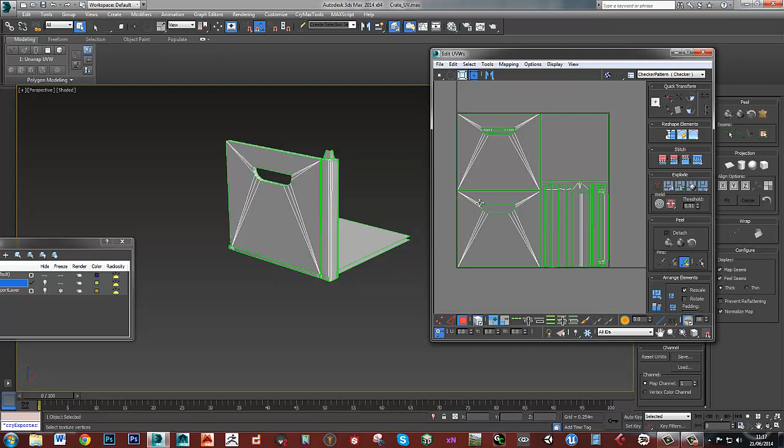There's just one thing that I need to do before I can bake this down, which is I need to make sure that none of my UVs are overlapped. So for example, this UV here, or this bit of texture on the bottom, the inside bottom, is the same as that piece there that's on the underside. So what I need to do is just to choose one of those that I want to bake, and the other one I'm just going to move it off to the side.

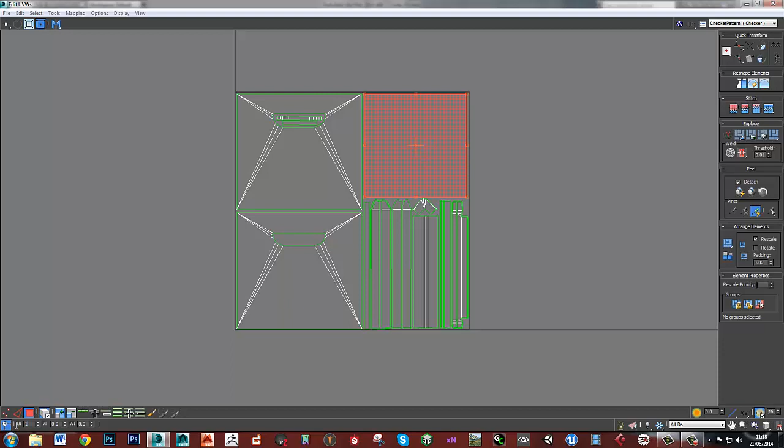So I'm going to bake this one. I'm going to bake the inside because I think you're going to see that more often than the outside. So what I'll do is I'll take this shell here on the outside, and if you hit this little box in the bottom left hand corner of the UVs where it says absolute or relative type-ins, if you put that in so it's highlighted and then just type 1 into the U, it'll move exactly 1 UV space off to the right.

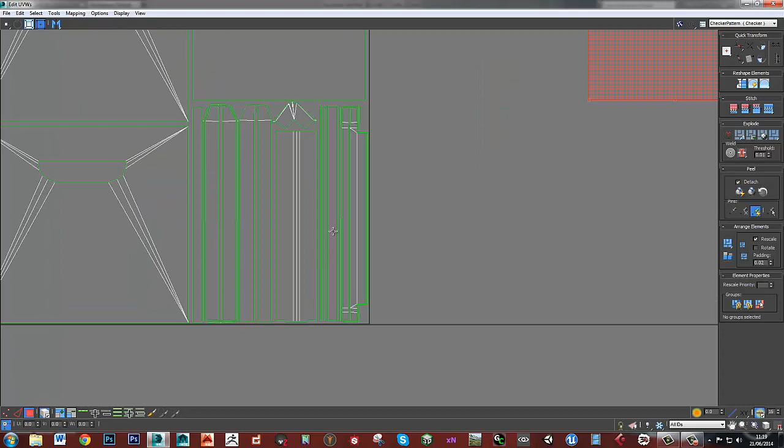So actually that is still on top of that. It's just that when this bakes, it's only going to bake what's in that space, but when you texture it, whatever you put in this bit of texture will go exactly onto that piece. So I think there's one other bit, which is these pieces here. So again, I'm just going to choose to bake that one and not this one. So I'm going to get these pieces, which are the same as those pieces in there, and I'm going to move them off 1 to the right.

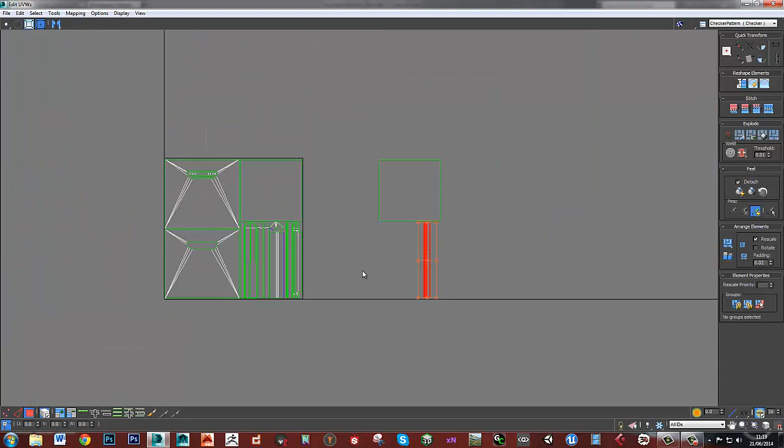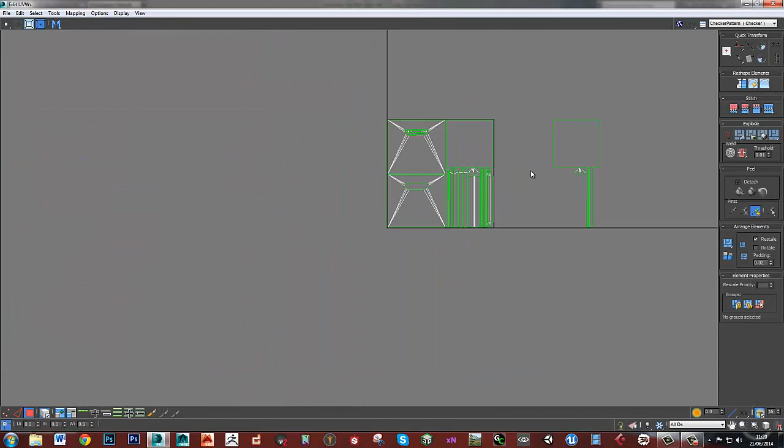And then just to double check, in fact there is another piece, because there's this bottom piece here. So that piece there also needs moving off 1 to the right, and that should be everything that was overlapped. But just to make sure, with the poly tool selected, I'll go to select and I'll do select overlapped polys, and provided nothing comes up, nothing highlights, then you're good to go.

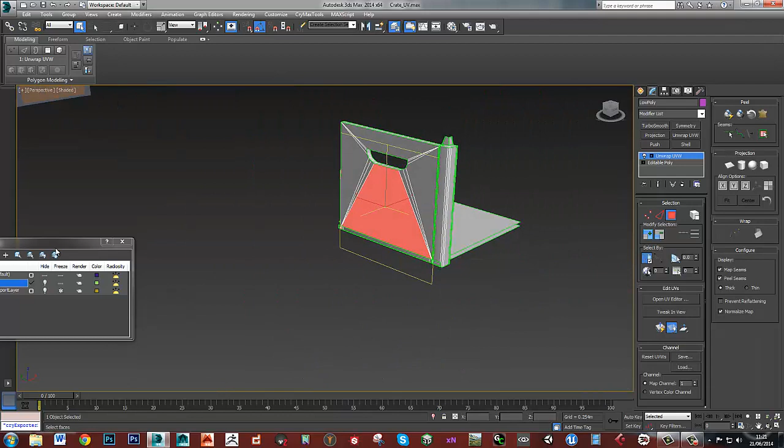Okay, so the next thing to do is to get this ready for the actual bake, and we're going to need 2 slightly different models. One that is exploded for the normal map bake, and one that isn't for the AO bake. So I'll explain what exploding is in a second when we get to that bit, but for now I've got my high poly on another layer, so I can just hide that on and off. So for now I will make it unhidden so I can see it.

I'm going to collapse that UV edit down and select my low poly, and what I want to do is to put a projection modifier on. So I'll just hit projection, or you can find projection in the modifier list there, and I want to say what I'm projecting from. So I'm projecting from the high poly, so I'm going to go pick and then just click on the high poly. So now we've got that high poly model in there. I've just called that high poly. It doesn't know that it's the high poly, it's just the name that it's been given.

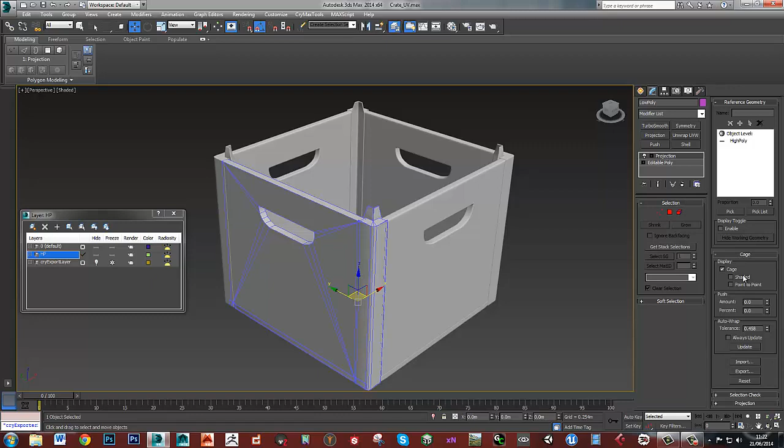Then what I like to do is to come down to cage and turn shaded on, because that makes it a bit easier to see what you're doing. Okay, so once we've got shaded on, you can see there's little bits like this where the high poly is just poking through that low poly cage. That's going to cause an error in the bake. So we need to make sure that this blue cage is pushed outside and is completely outside of the high poly. To do that, all we need to do is just push it.

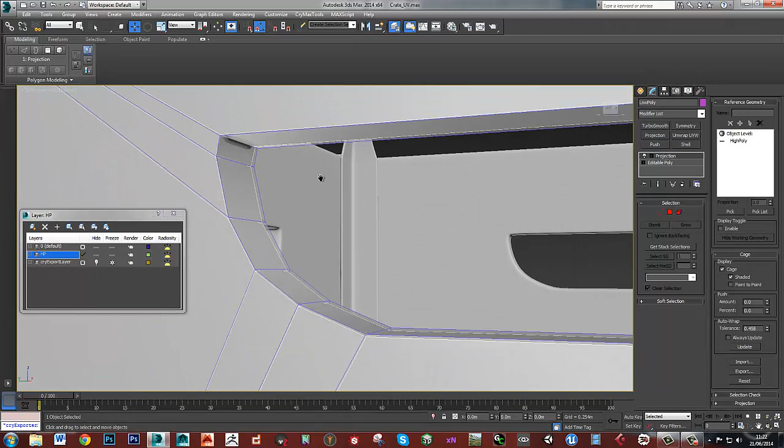So just grab that spinner, move it up until it's pushed outside. What you want to do with this is push things as little as you possibly can, but make sure that you've pushed them enough to completely encompass the high poly model. So I think I'm okay.

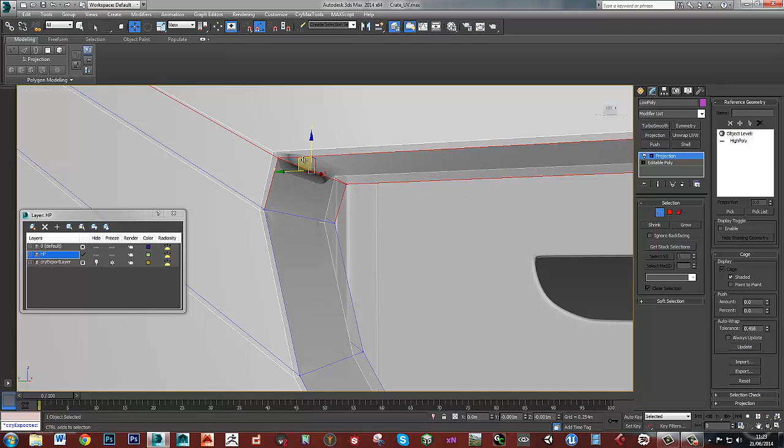It's just a piece there that's not quite pushed. So what you can do is go into vertex mode and move the verts on these cages manually. I really strongly recommend you don't ever do that. If you find a time when you need to do that, what you probably need to do is go back and alter your low poly model to be closer to the high poly model. It's just bad practice to move these individually. It makes it really hard if you ever have to rebake, meaning you have to do all of that again. It can be hard to remember what you had to do. It's time consuming. It's just bad practice.

But I think that's okay. I'm actually going to bake this in XNormal, but what I am going to do is a test bake in 3ds Max to make sure I've not got any issues, whether my cage is completely covering it.

So what I need to do is go to render texture, which is 0 on the keyboard. Then I can choose which folder I want to put it in. Okay, so I'm going to save it into that folder. And let's have a look at these settings.

So if we go into render settings and go to setup, I don't think we should have to do anything in here. You can turn these things on if you want to do a bake from 3ds Max. We're doing it in XNormal, so as this is a test, it doesn't really matter. We can turn padding off for now as well. We want to make sure that projection mapping is enabled, because that's what we're doing - we're projecting from the high poly to the low poly. You can come into options here.

For now we want to make sure that ray miss check is on. What that'll do is highlight in red any areas that our cage isn't covering, and all we're doing at the moment is a test bake to see that that is working. So then we want to add a normal map. We'll change the size of the normal map to, let's say, 1024, just so that we've got a bit of detail and we can see it. And then we can just hit render.

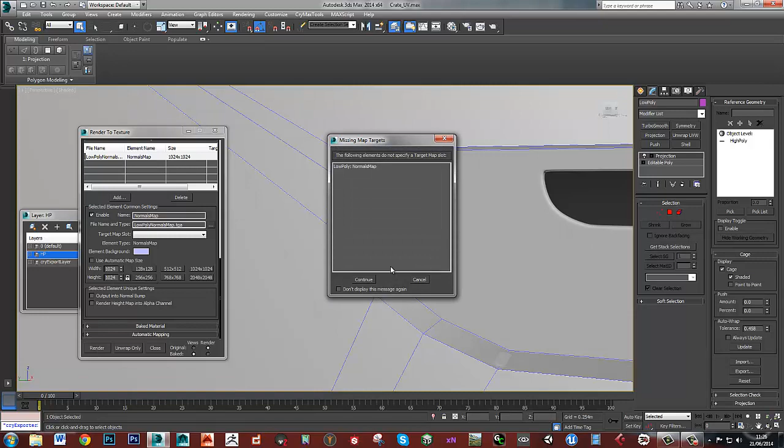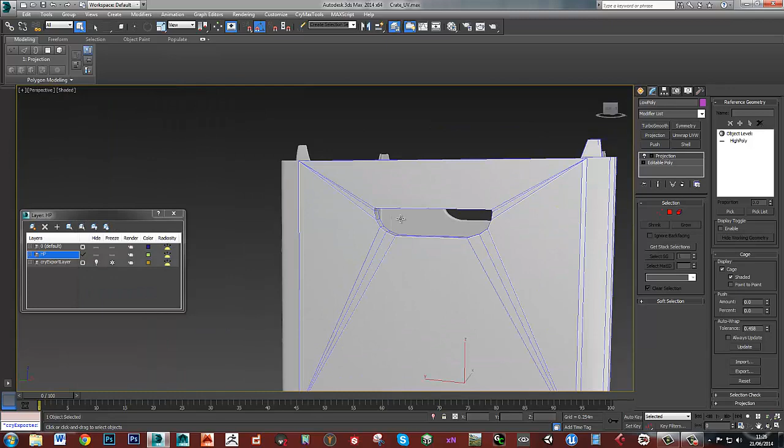Okay, so let's now export these into XNormal to do our ambient occlusion.

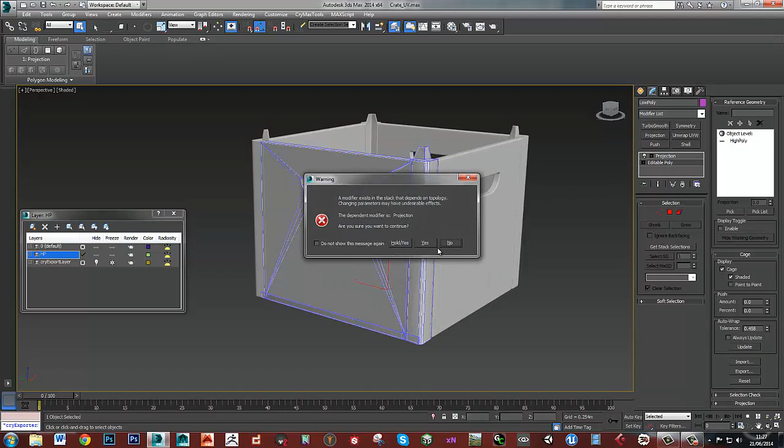So what we need to do is, in order to export this into XNormal, we need it to be an editable mesh as opposed to an editable poly that it is now. So if you just go down to your editable poly, click yes, that's fine, and then put an edit mesh modifier on, and then come back to your projection. You can see that's just triangulated that. XNormal just needs it to be like this in order to read the cage data.

Now we can go File, Export, Export Selected, and find where you want to export it to. Now, if you have XNormal installed, which is down here somewhere, then you should have in your save as type an XNormal SBM exporter. If you don't see that, you need to stop this video, go and sort out XNormal, go and install it. It's free to download, so that should be okay.

Then what we'll do is just call this low poly crate or whatever you want to call it. Save that as a .sbm file, and click on the low definition mesh, which will export all the options you need for the low poly mesh. Click export, and you should get the scene was exported successfully, so that's good.

Now we'll get our high poly mesh file, export selected, high poly, save that, and this time that's going to be a high definition mesh. This doesn't need to be an editable mesh, it can be an editable poly for the high poly one. Click export, that's going to take a little bit longer because it's got more data in it. Okay, close, that's good. So now let's open XNormal.

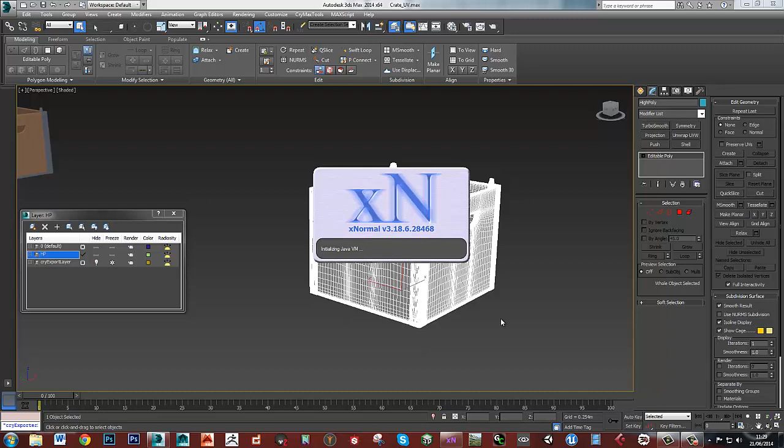First, make sure your options are set correctly. Go to the plugin manager, open that up, go to tangent basis calculators, and find MikkTSpace. Click on that and go to configure, and make sure compute binormal in the pixel shader is ticked. If you're exporting to Unreal 4, which is what I'm using most of the time, you'll get slightly better results if that's ticked. It's hardly noticeable, but you get a little closer to a synced normal in Unreal 4. So just make sure that's ticked. We can shut that down.

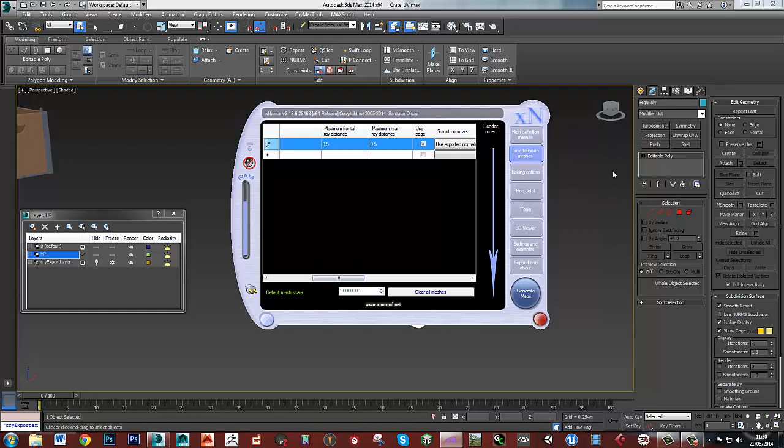Then we're going to go to high definition meshes. If you've got something in there, just clear these out of high and low. Right click in there, add mesh, and let's find our mesh. So it's this, that was the high poly. Low definition mesh, add mesh, the low poly. And we want to tick use cage because we already set up the cage, that blue thing we used in the projection modifier.

Baking options, let's choose somewhere to save this, so put it in there. Oh, I've already got a folder called that. And this is going to be an AO map.

In order to do our normal map, we'll need to explode our mesh first, so we're going to make sure ambient occlusion is ticked, and we'll have a little bit of padding. 2 padding should be enough for the AO, you can put that up to 4 if you want. I'm going to do this at 2048 by 2048 with a mind to my final game ready asset being 1024 by 1024, so I'm baking everything out at double that resolution to have those high resolutions to work on in Photoshop.

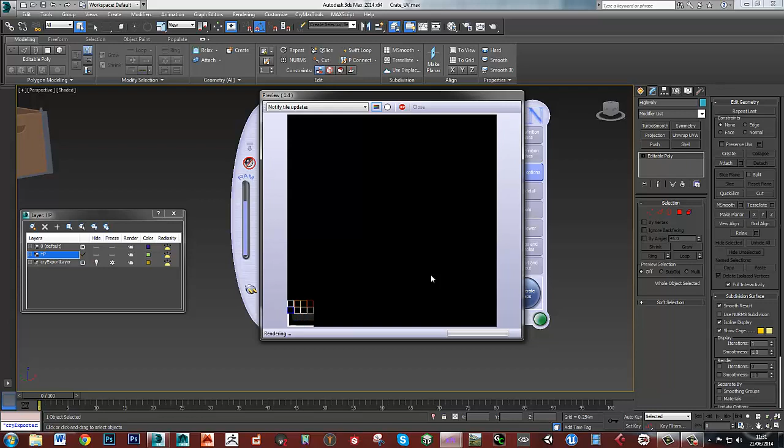Then I think we're good to go. Anti-aliasing can be set to 1, that's fine, all this is fine. Hit generate maps, and this is going to take a few seconds, so I'll just pause the video.

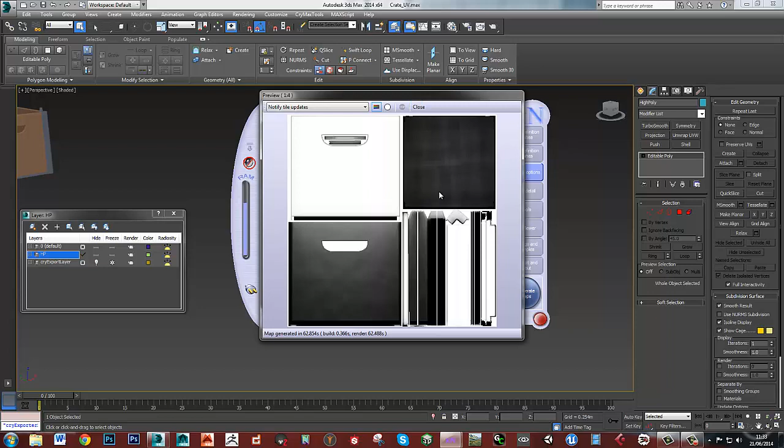Okay, once that's done, you should see something like this, which is essentially our AO, just these shadows baked down onto our UVs. That looks perfect to me, nice and neat. I can't see any errors in that, so I'm happy with that. And I'll close that down.

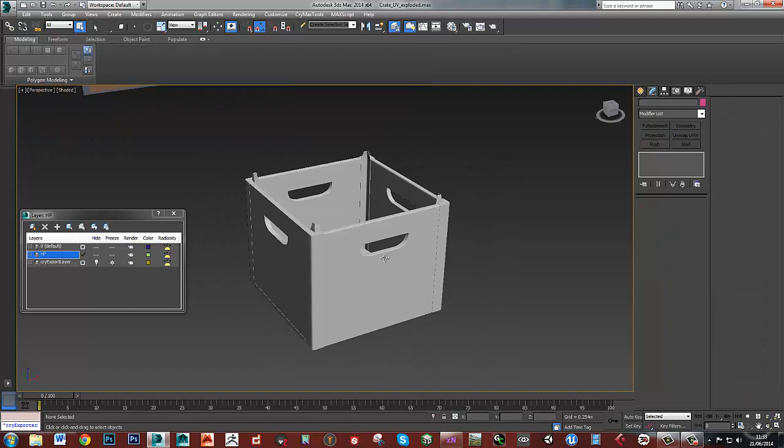The next thing I need to do is what's called exploding the mesh. So first I'm going to save this as UV exploded, as a separate file. There's loads of different ways of doing this, you can use material IDs. Experiment with different methods and find one that works for you. I tend to just explode the mesh, which is maybe not the fastest way of doing it, but I understand what I'm doing with that.

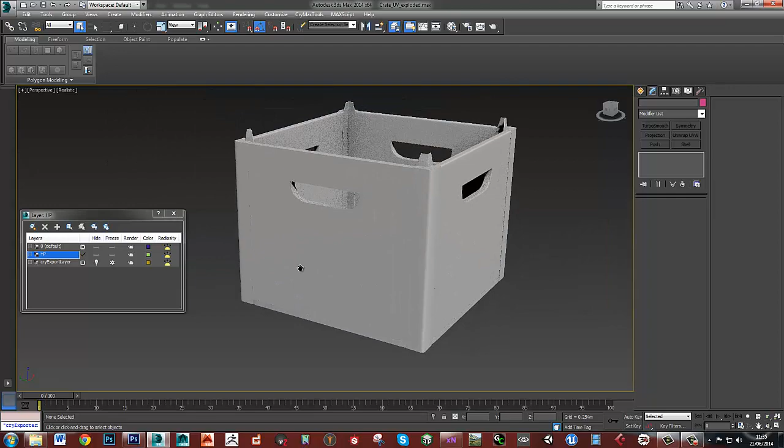So what I mean by exploding the mesh is, if we look at this, I've loaded up the AO map we just baked. What you're getting in here, if you look at areas like this, we've got where the bottom of this crate sits on this side piece, we've got some shadows baked into that. That shadow there, let's get back to 3ds Max, let me put that to realistic. It's this piece here, this strip of metal along the side. So we're also going to have shadows where this strip of metal sits over the top, which you can just see starting to form in there. Basically all this has got one piece of geometry projecting onto another piece of geometry.

In our normal map, we don't want the shape of this piece of wood being altered by this piece of metal. So we want to separate them all out, and one way of doing that is by exploding it.

I'm going to drop that down to an editable poly, and what I usually do is put an edit poly modifier on top, not edit mesh. Now we can take the elements one by one and start to move them out of the way.

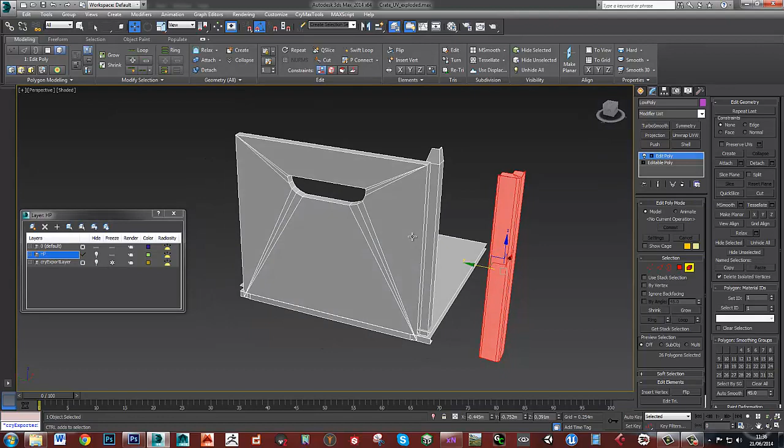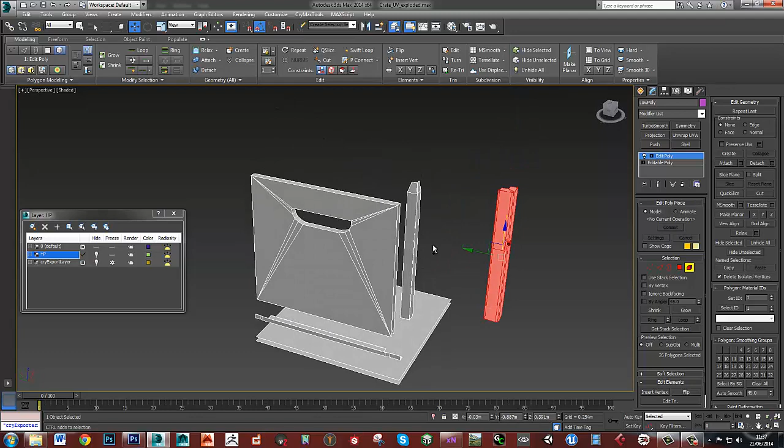I'm going to move this one over here and hide my high poly. I'm just moving them so they're not overlapping each other anymore. If you move them in just one axis, it makes it easier to line up the high poly after, so rather than moving it up here or something, just move it directly down or directly to the side.

Okay, so that's done. We can turn our edit poly on and off now, and as we turn that on and off, we can still go back to what we originally had.

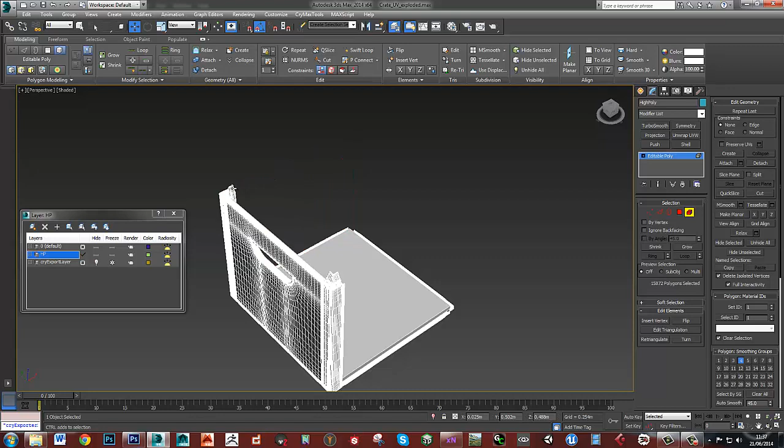Now we need to get our high poly, and what I'm going to do is delete all of these elements now that we don't need. Before, when I was doing the ambient occlusion, I wanted those elements because I wanted the shadows baked from one thing to another. Now that we're doing the normal map, I don't want them.

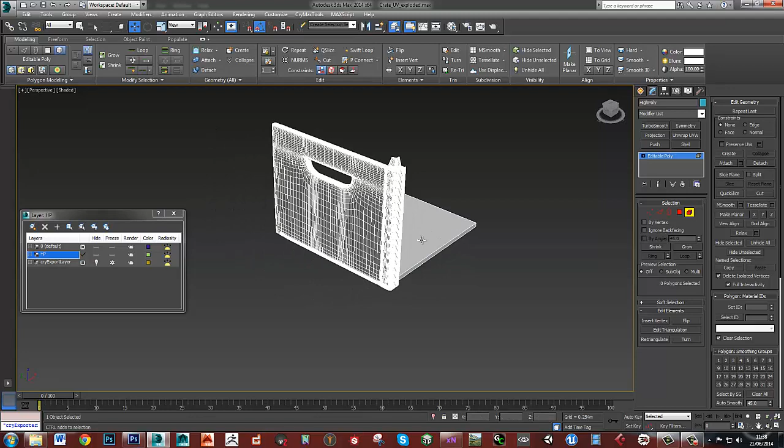Okay, so we've just got those pieces. Let's make sure that our low poly is exploded, and then let's get our high poly, and then it's just a case of getting these elements and moving them to line up again.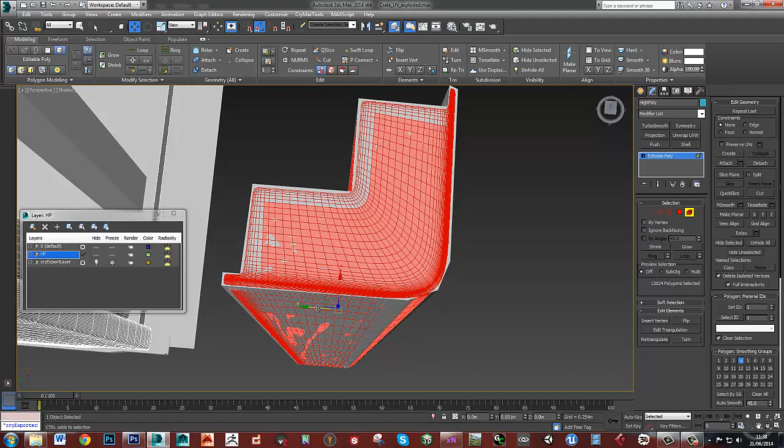So you want to be fairly precise with this, so just take your time, and I'll pause this.

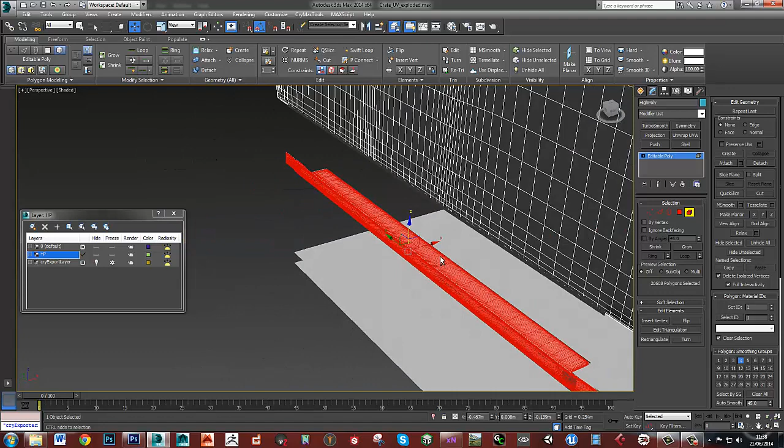Okay, so that's done. One thing I should have done that I didn't think to do was put that into another edit poly modifier as well, but it doesn't really matter since I've saved it as a separate file, so that's fine.

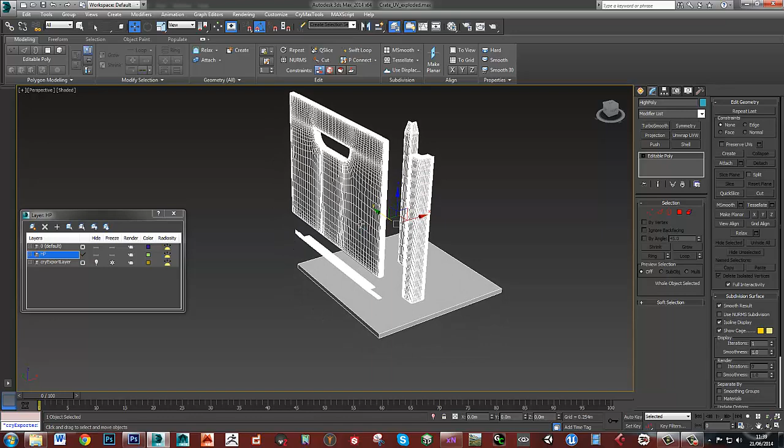So now our low poly and our high poly are matched up again, but nothing's overlapping anymore. So now I can just repeat the process. I can get my low poly, put a projection modifier on, pick the high poly - oops, not pick list, just pick.

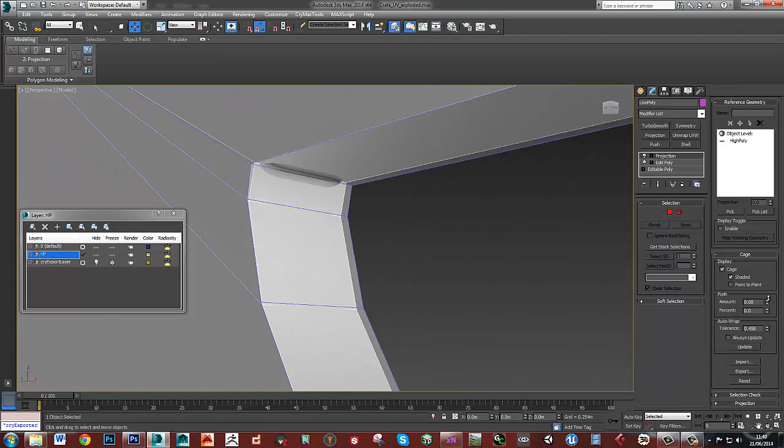I can pick the high poly, turn shaded on, and make sure that, I think this was the bit that stuck out most, so as long as that bit goes over I should be okay. So I can bring that out again. We can do a test bake, but I'm fairly happy that's going to work.

So that's it. Again, now I need edit mesh on so that I can export that to XNormal. Now file, export selected, I'll call that low poly exploded. Terrible writing.

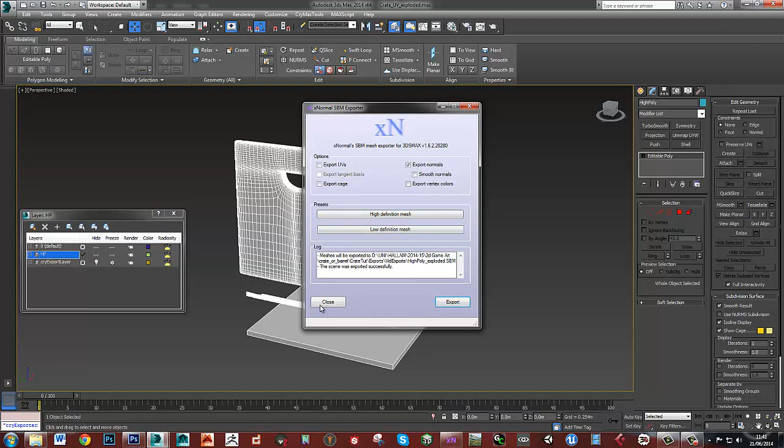And I will select low definition mesh and export that. Then I'm going to take my high poly and export that, and that's high poly exploded. Save that. High definition mesh, export, close. So back to XNormal, clear all these meshes.

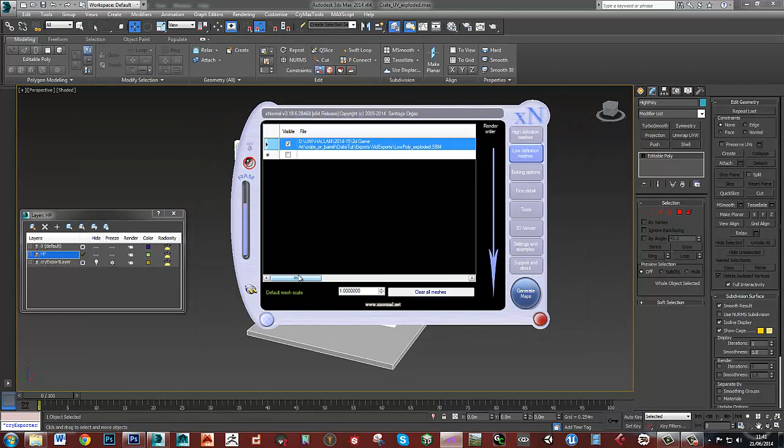Let's get my high definition mesh, which this time is high poly exploded, and my low definition mesh, which is low poly exploded. And I want to make sure my cage is turned on again, so use cage.

Baking options - this time we're not doing an AO, we're doing a normal map. For normal maps you just want loads of padding, so 16 is probably enough, to be honest, but you can't have too much padding in a normal map, so just turn it right up to 64 or something.

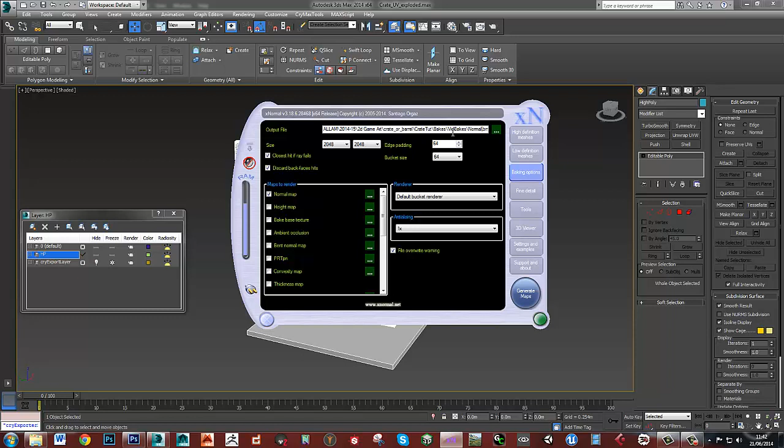This time this one's going to be called normal, although it'll put that suffix on anyway, and with a bit of luck we can just generate the maps, and that looks fine. So let's just put the padding on after. That looks okay.

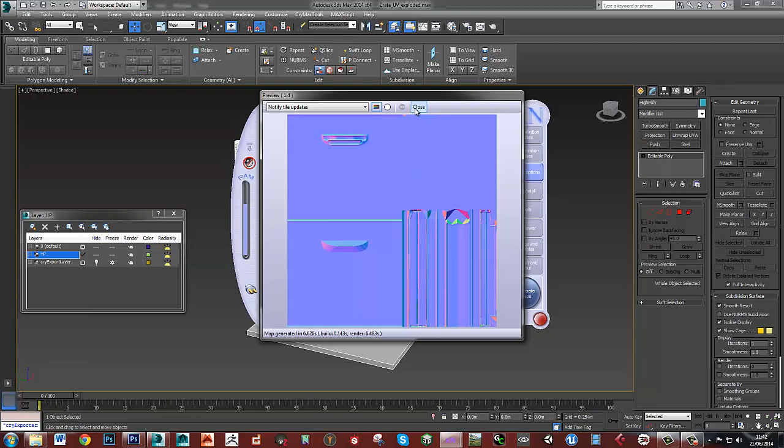So the last thing to do, or the sort of last step of this, is just to test everything in something like Marmoset. It doesn't really matter, but just make sure that your normal map is looking okay. So shut down xNormal, and

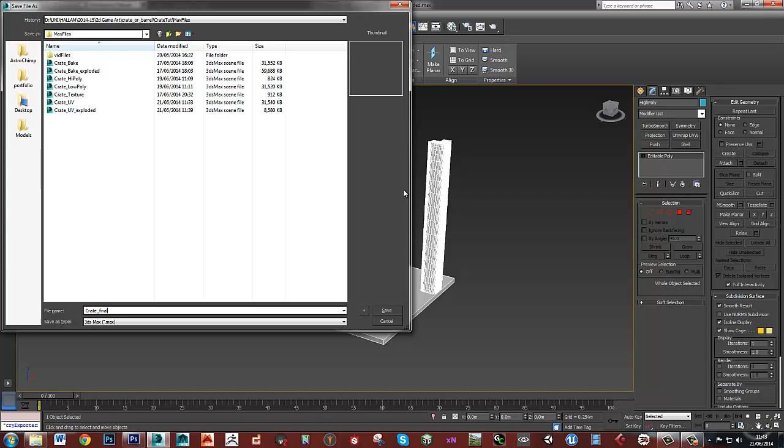what I will do is I'm just going to build my crate. So let's just save this as something else. Let's call it final model or something, and I can delete my high poly out of this now. I can get rid of all of these, back to there, and all I want to do now is just put my mesh together. So I need one of those. It's going to sit here.

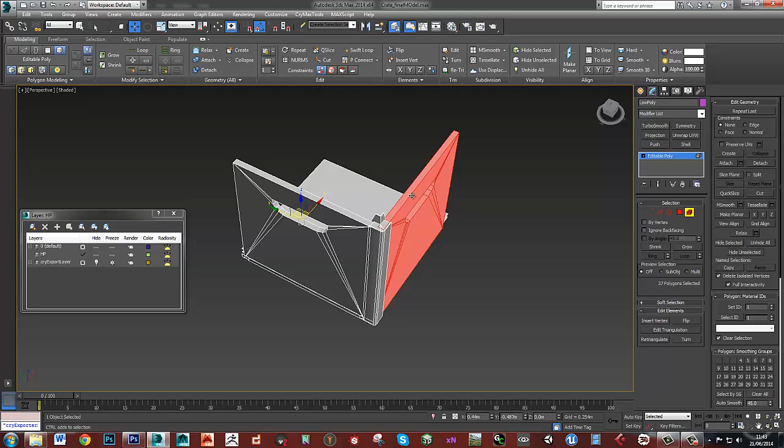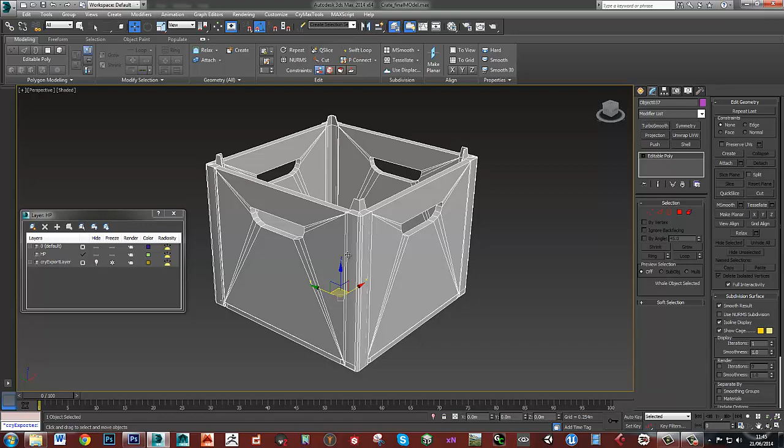Like that. Okay, so I'm just going to go around and turn this back into a full crate. And as I'm doing this, my UVs are staying stacked on top of each other, so I don't need to worry about those. Okay, so here's my crate, and let's export that. So I'm just going to do file, export selected. I'm going to export this as an OBJ file. And let's call this crate done or something.

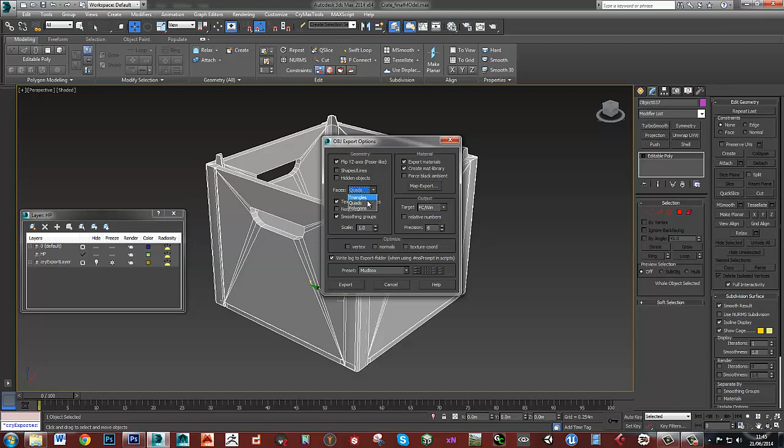This should be our final model, pretty much. That's all fine. Change the faces to polygons. If you set the preset to Mudbox, that usually comes into Marmoset fine. So let's open up Marmoset 2. Okay, so here's Marmoset, and add a mesh. Okay, that's our mesh, that's looking good.

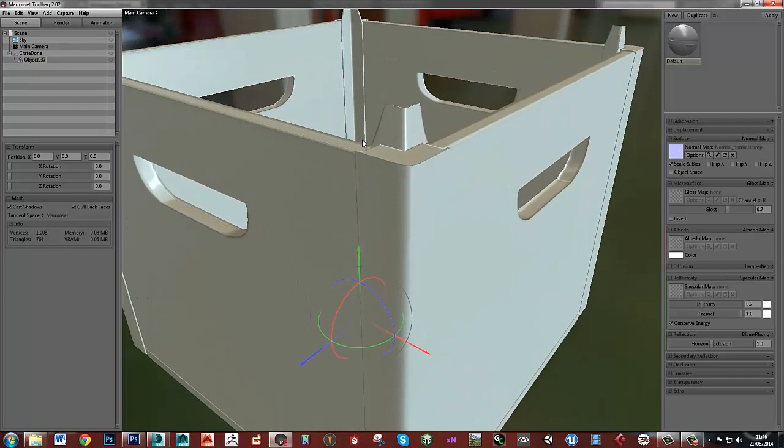Now we just want to add all of our maps that we've baked into our material. So if we click on our material, first thing we'll do is check our normal map. So that is that one. Okay, so when I bring in my normal map, it's going to look wrong and weird, and the reason it looks wrong and weird is because the Y just needs flipping upside down.

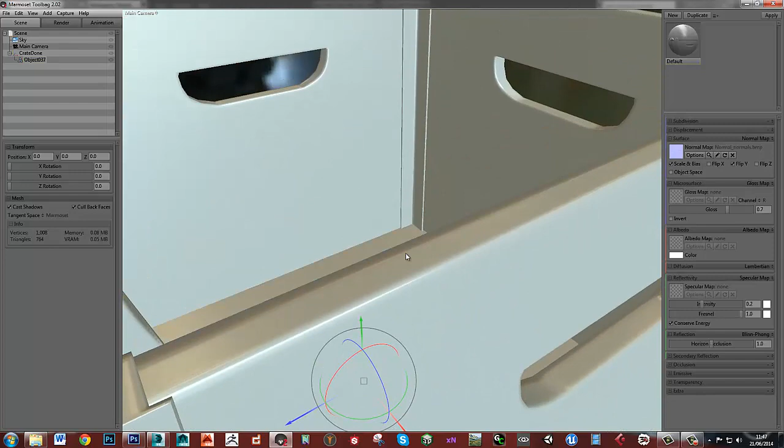Different engines, different renderers have Y flipped other ways. You can flip the Z and the X as well in Marmoset. I've never seen anything that has anything other than Y flipped. So if we flip the Y, you should see everything starts to look quite nice now. We've got these nice soft edges, and this is starting to look a lot more like our high poly did.

So around here we've got the normal map working, and it's curving the light to look like that's not actually a hard edge. So if I take the normal map off, you can see that looks exactly how it is in the low poly. There's a right angle between this piece and this piece. If I put my normal map on, it starts to soften that edge. It's definitely worth at this point going around and really studying every aspect of your normal map and checking it is working exactly the way that you want.

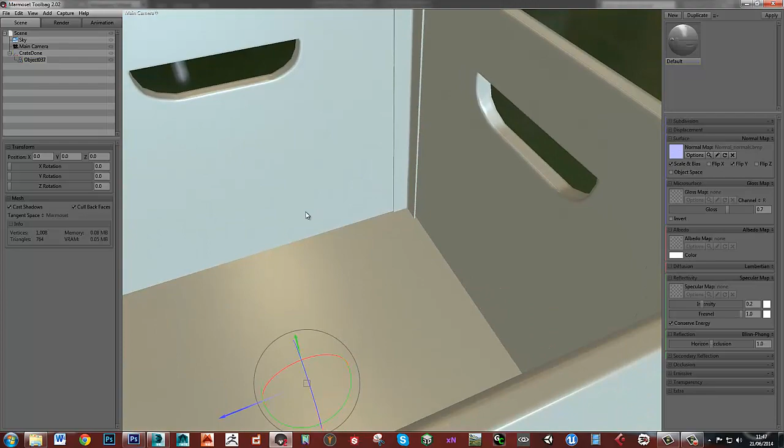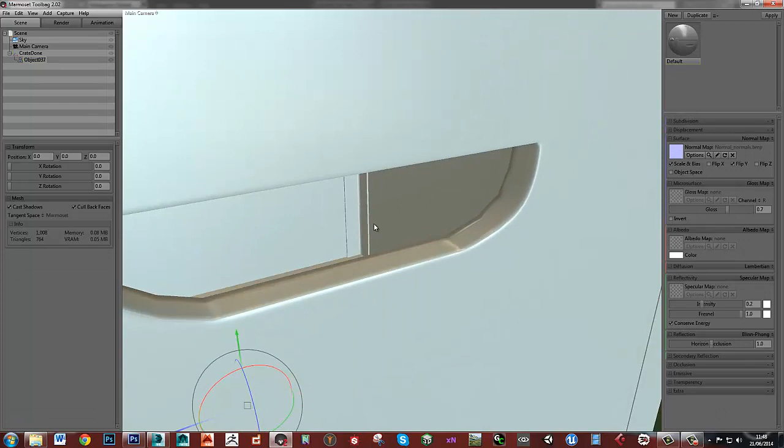When we talk about synced normals, if your normals are perfectly synced, then this should essentially look identical to the high poly model. You can rarely get normals synced perfectly, but this is pretty close. Okay, so that's the normal map.

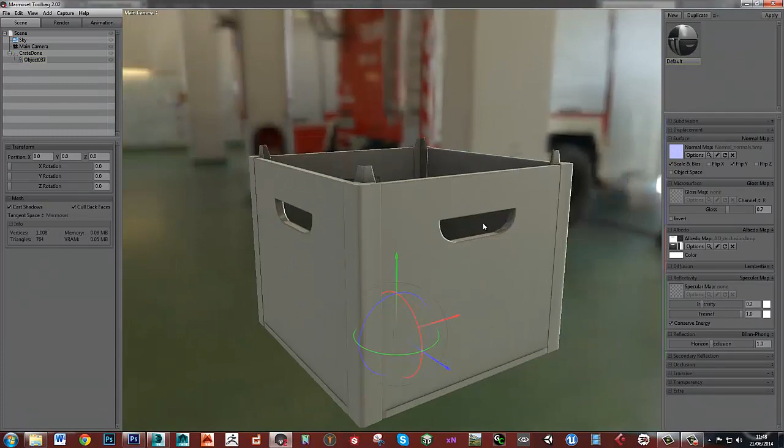What we'll also do is in our albedo, I'm just going to put in the ambient occlusion as well and check that's working. So that's just a little bit of shadow baked in, and you can see as I put that on, it just gives a bit of life and a bit of texture to the model. And this is going to give us a good basis to start our texturing from. So just do all of this bit slow and methodical. Spend some time going around making sure that your bakes are all neat and tidy. All of this stuff is going to help a lot with texturing, and it's a good way to just check that everything's worked correctly up to this point.

So that's baking done. The last step is to texture this, and we're going to fill in some more of these. So our albedo map that's in there is going to come down into our occlusion map. Then we're going to create an albedo map. We're going to create a microsurface gloss map or a roughness map, and instead of creating a specular map, we're going to create a metalness map as well, to make these bits look metal and the wooden bits not look metal. So that will all be in the next video.